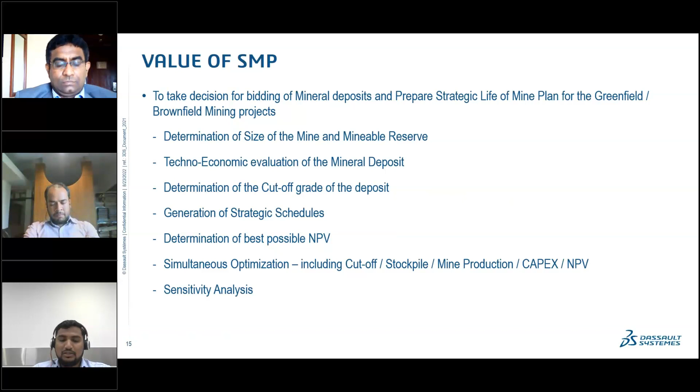So coming to the inputs for the pit optimization. This strategic mine planning tool takes inputs not only technical, it also takes economical and regulatory input. In technical, you will have your validated or evaluated resource model, which we call the tonnage grade model, in which you will have your estimated grade material. You will have a density defined in that, rock types defined, lithologies defined, and the topography defined. So that complete resource model, which is evaluated, will be taken as an input for the strategic mine planning.

And the other input in technical is your geotechnical parameters. That means slope angles have to be defined, because until and unless you ensure the slope angles, you cannot get the ultimate pit limit. It's not a vertical top-down kind of thing, so the pit has to be in a particular slope which is operational. So geotechnical parameters can also be included in the strategic mine planning tool, and you can have various methods to give the slope angles - a single slope angle, or slope angles based on the bearing, based on rock types, or based on any other parameters defined in the geotechnical study report.

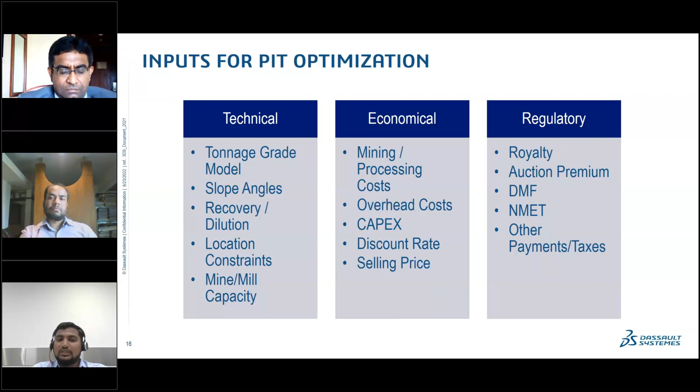Nested pit shells are based on the revenue factor. You have defined the selling price. Let's say, for example, you have defined $100 as a selling price for a particular commodity.

What strategic mine planning does is it gives an option to define the revenue factor. That means, with respect to the selling price, if your selling price is reduced by, let's say, 30%, what should be your pit limit? If your selling price is increased by 10%, what should be your pit limit? So based on the revenue factors, you can control how your pit shells are defined.

Based on the revenue factor, it generates a nested pit shell, a group of pit shells, which can be further used for generating the schedules, for selecting the optimal pit shell, which will be functioning as our ultimate pit limit.

And for that, we have tabs already defined, like economical parameters. So all those economical parameters will be given here, along with the grade cutoff tool.

Based on that, it will give the pit shells, the range of pit shells. So at the bottom, you can see the color coding has been given, pit shell number 1, 2, 3, up to the like, the pit shells.

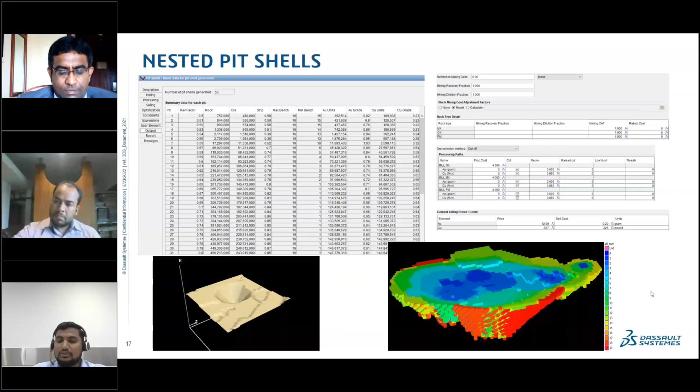Once this nested pit shells has been generated, you will select one of the pit shells, and for further analyzing or optimization, you will determine the optimal net present value of the particular project.

The input you will give here is your initial capital cost - what's the capex you will be funding into the project, what you will be keeping into the project, and what will be your terminal value. Terminal value is nothing but once your mining is completed, what will be the terminal value of the project, because you will be having the machineries, the plant, the buildings. So if all those are dismantled and sold, what will be the terminal value? That's the terminal value.

And replacement capital cost - you start with certain machineries, so they have to be periodically replaced, like every 5 or 8 years. So based on the time, maybe after 8 years you will be replacing the excavator, and in that year you can inject additional capital cost. This way you can define the time period - it is not fixed. In the strategic mine planning tool, this helps you to define your capital at a particular periodical time investment.

And you can define the discount rate per period, and also the implicit or explicit time cost. Implicit time cost is whatever cost you are defining - whether mining cost, processing cost, selling cost, or other overhead costs - that will be the same for the entire life of the mine.

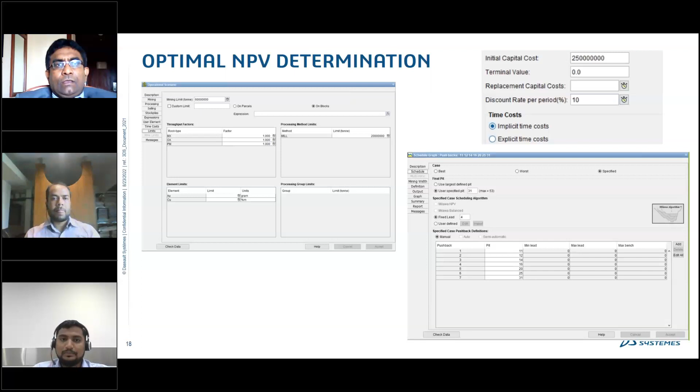And from that you can generate the strategic schedules. Why strategic schedules are important is your NPV - this schedule determines your NPV.

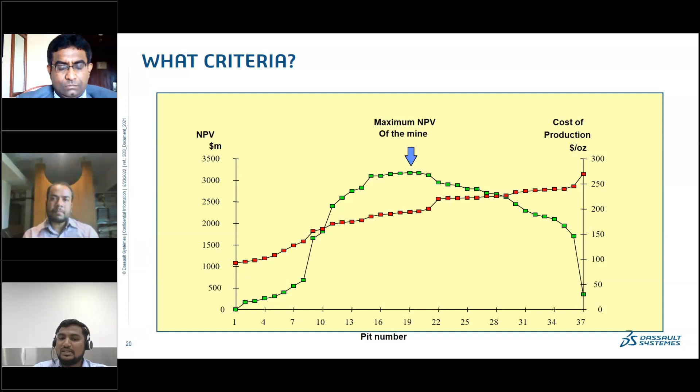So it depends on the organization which pit shell has to be selected as their ultimate pit limit. If the organization wants to maximize their NPV of the mine, they can select the pit shell giving the higher revenue, higher NPV. And if the organization's objective is to produce below $225 per ounce, then the capacity of the mine will be increased, but it will sacrifice the NPV too, because when you increase your ultimate pit limit, you generate more overburden and your lead distance increases. So considering those, your NPV will be less. It depends on the company objectives which pit shell has to be chosen. This is the best example to understand that.

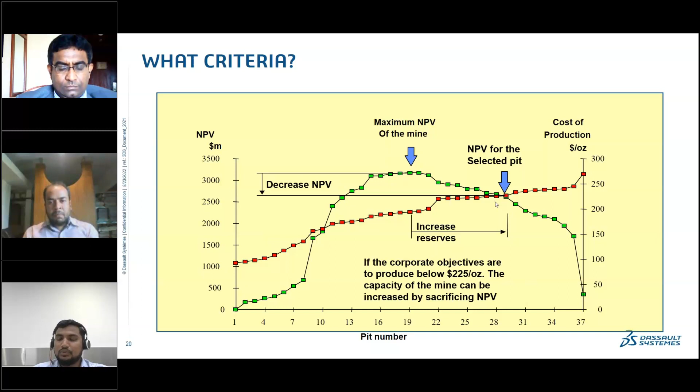You can see at a particular pit shell, the max NPV increases, after that it decreases, and there is an increase in reserves from the maximum NPV pit shell to the user-required, or you can say the company-targeted, pit shell. So there is an increase in reserves, but a decrease in NPV. These are the different criteria an organization can use to select a pit.

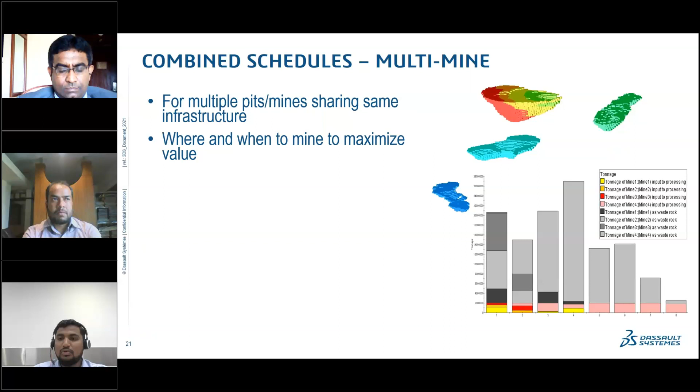Apart from that, what we've been showing is for a single project. So what if you have multiple mines but shared infrastructure, like your processing plant, crushing plant, mining fleet and so on. This helps you understand where and when to mine to maximize value, because each mine you'd otherwise have to optimize separately and then combine in Excel, but that won't give accurate value when you have shared infrastructure. So this strategic mine planning tool also has an option to include all four mines and then run the strategic schedule there.

Another requirement is to optimize the blending from multiple mines when you have a single processing plant, so the input grade stays consistent. You have to optimize the blending for multiple mines - from which mine, how much you have to produce, what kind of material every period, that is every year, so that you get a constant grade to the plant. That needs optimized blending, and you can use the same resource model or merge all the resource models. Let's say if you have three mines, you can merge the three resource models into one, and do the optimization process, or else use the same model with a drop-down option for each mine.

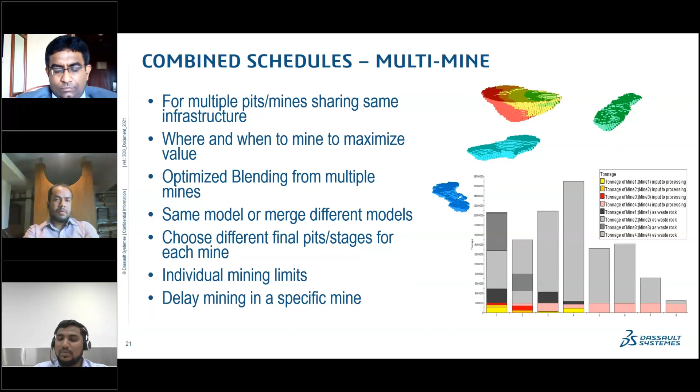You can select that resource model and choose different final pits or stages for each mine, because when targeting the process plant for particular quality or maximizing NPV, the pit stages or final pits will be different for each mine, and you can give individual mining limits. So one mine can produce, let's say, 0.5 million tons, another 1 million tons, another 1.2 million tons. You can give individual mining limits there, and also delay mining for a specific time. Let's say the first mine got all the approvals, but for the second mine the approval is delayed for 6 months, so you can give the delay in mining for that specific time. Also, if you have water issues or something in between, you can include that as a delay too.

Next is the strategic mine planning's advanced strategic scheduling tool. Whatever optimization and strategic schedule we've generated, we've evaluated each stage step by step - we've generated the schedules, evaluated the cutoff, what should be the cutoff to get higher NPV, stockpiles, and blend.

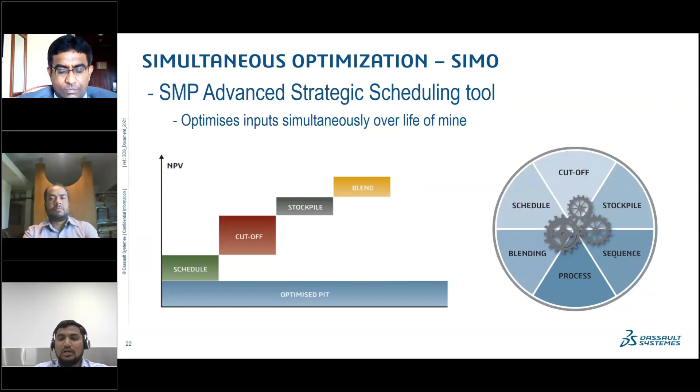But this simultaneous optimization simultaneously takes all the inputs - cutoff, what the stockpiles should be, what your mining sequence is, in which direction you want to mine, process throughput factors, blending parameters, schedule parameters. It considers all of those and generates a single schedule, so there's no need to validate one step at a time. It validates all those parameters, and it also helps you optimize the capex.

Let's say in future, if you are increasing your mining limit, for every ton of increase in the mining limit, what will be your investment per ton, so you can see how you can optimize your capex. For example, from 1 million to 2 million ton, if you are increasing your mining production, and let's say your mining cost will increase by $1, how much capex you will require and how your NPV varies. If it is $2 per ton for the increase of the reserves, what is the impact on NPV? This way you can optimize your capex too, and it unlocks the hidden NPV, because you are evaluating all the parameters in a single go, where you're missing in single steps otherwise.

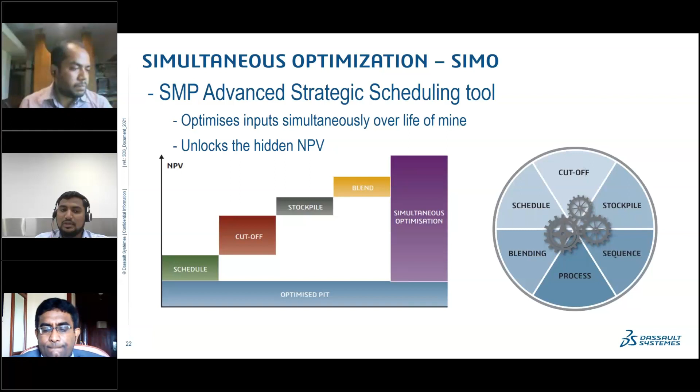The next one is, you got the NPV, but you want to check what parameter is most sensitive for your project. Like you are giving a mining cost, processing cost, but what happens in future if your mining cost increases or decreases? What impact will it give onto the NPV? So you have to observe which parameter is very sensitive or delicate, so that if that parameter changes a little bit, let's say even for $1, the NPV change may be more than what is permissible.

On the right hand side you can see there is a red line, which is the price for AU, that is selling price of gold. You can see selling price of gold in this particular project is very sensitive. That means if your commodity price is changing, you have to rerun your scenario, and check whether you're going in the right direction, whether your current mining schedules or long-term schedules are in line with your corporate objectives, how your profit changes if that selling price is increasing, let's say by 10%, how much percentage variation in your profits. All this has to be checked. This sensitivity analysis through spider graph helps you understand what parameter is most sensitive for your project.

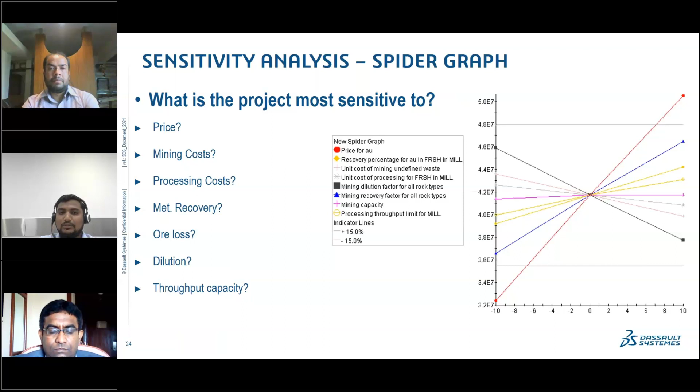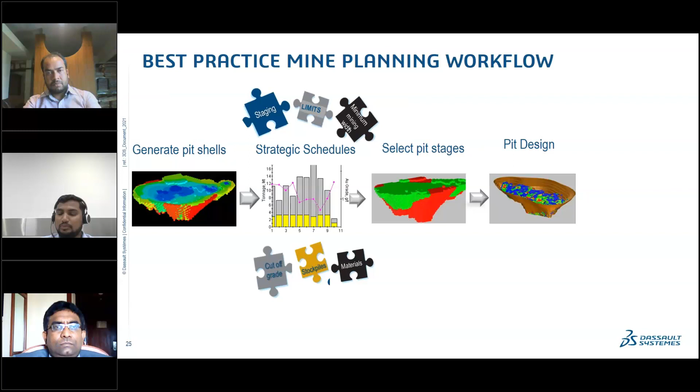The best practices workflow in mine planning is, once you have evaluated the resource model, to generate the pit shells and the strategic schedule so you determine optimal NPV by giving stagings, limits - mining or processing limits, throughput limits, minimum mining width - so your ultimate pit limit has the minimum working width at the bottom bench. You can give the cutoff grade to stockpile materials. With all these inputs you can generate the strategic schedules, and select the pit which will be your ultimate pit limit based on your objectives and the stages. You can select the stages, that is pushbacks, in order to achieve the ultimate pit limit, and transfer it to the general mine planning package, like for pit designing and the tactical schedule, for generating your long-term or short-term schedules to create executable plans to operate or excavate the mineral there.

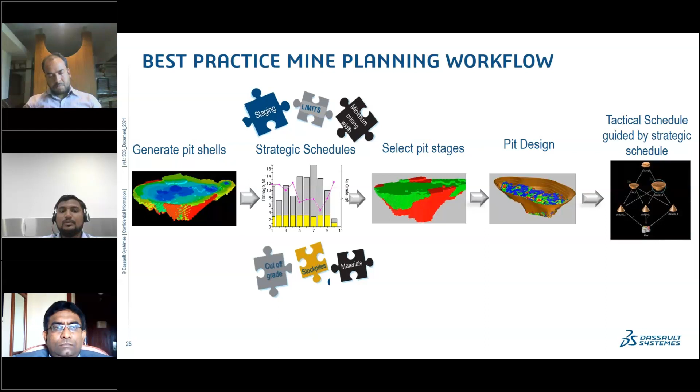Next, strategic mine planning also has a value in data centralization and collaboration. There is a web-based platform called 3D Experience platform, onto which you can centralize your data and collaborate for evaluating your mineral deposit for the auctioning processes. Various departments work together - finance works on the costing part, geology department works for preparing the resource model, and engineering department works for generating strategic schedules by taking inputs from geology and finance. The leadership team again evaluates the financial model you have created. So all departments are currently running in silos, and they need to be collaborated so that you get better value, with a track of each work, who is doing what, and all.

There will be a single version of truth because you have tracking of the file, and you're able to see which file is prepared by whom and which file is the final file. If two or three people are preparing a financial model, one person may not prepare it at a single time; he may be making changes based on inputs from finance, geology, or other departments continuously. At a certain point you won't be able to say which is the final sheet, and if he has made changes in the final sheet, recovering the earlier financial model is difficult.

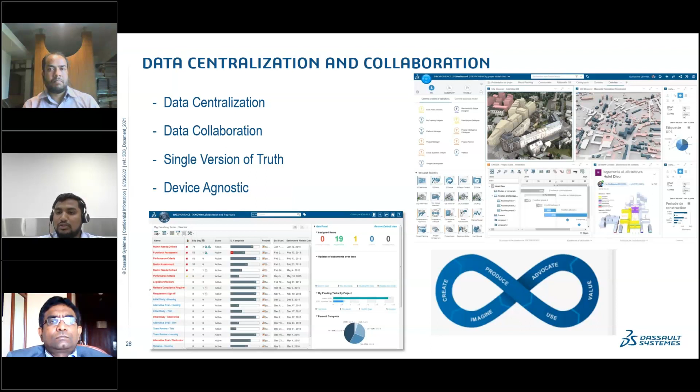So this is how your data collaboration works. It has user-based access, so you can control which user can edit, view, or work on it. You have user-based access here.

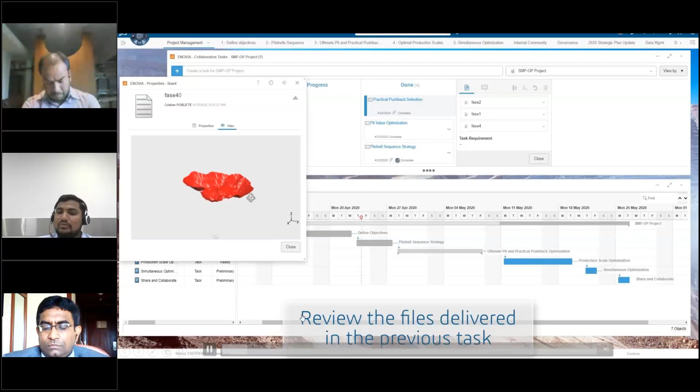And this is collaboration. If you have given a task to the finance or geology team, you can track those tasks, assign tasks, and review the files shared with you. If a geologist has prepared a resource model and you want to review it, you don't need to install any software — you can review it in the platform itself.

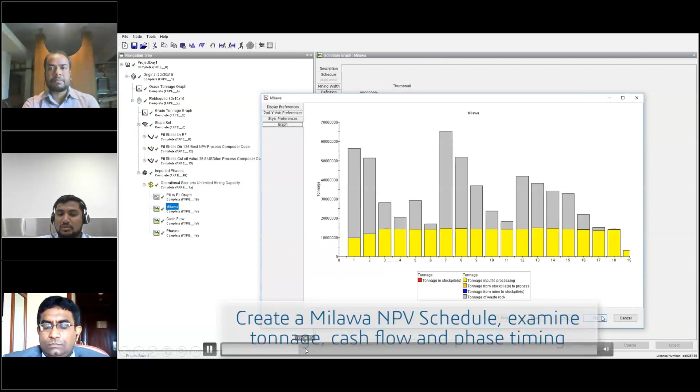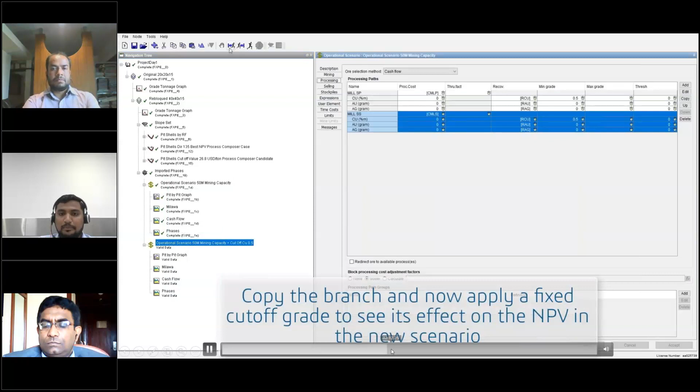Then you can work with optimization strategic schedules in the strategic mine planning tool. This is the entire strategic mine planning tool workflow, which I'll show in the demo here. Once you get the results, you want to optimize what will be your optimal mine capacity to fit the process, at which fixed cutoff grade you'll have maximum NPV. To determine that, you have to create multiple scenarios in the strategic mine planning tool.

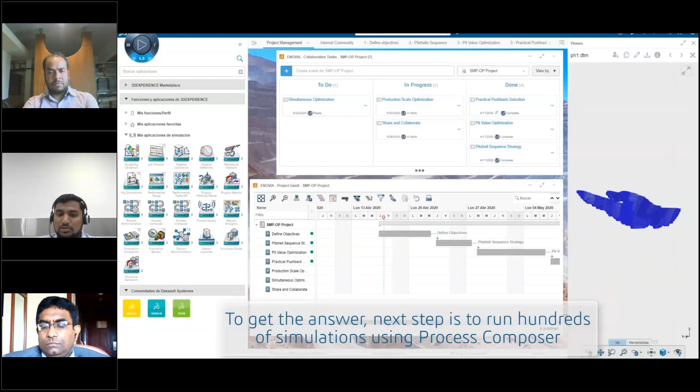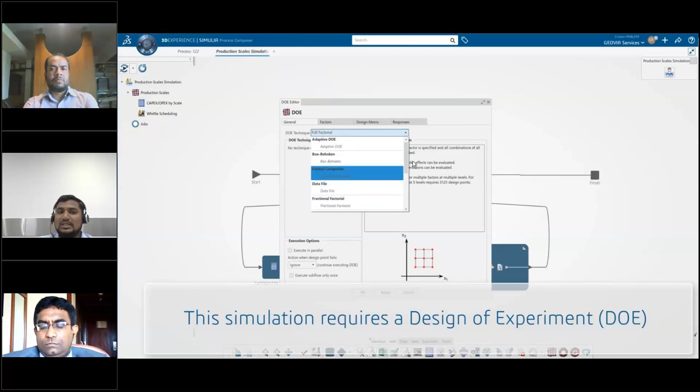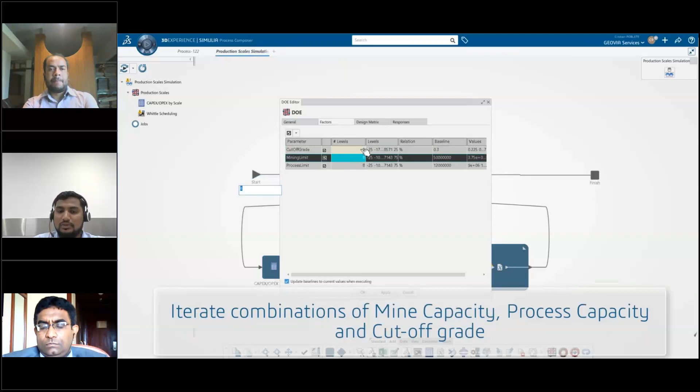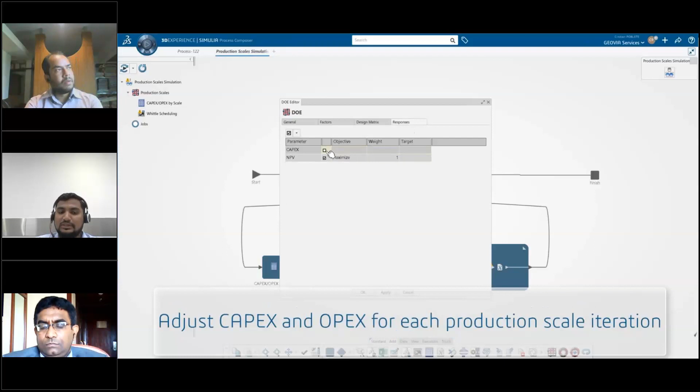But when you combine this simulation application with that — because in the platform you have multiple apps, like on mobile we have apps — you can use those apps to generate it. This design of experiment or simulation tool is one of the applications which helps you simulate those options. It will iterate combinations of mine capacity, process capacity, cutoff grade, and any other parameters you define, and you can also adjust capex and opex for each production scale iteration.

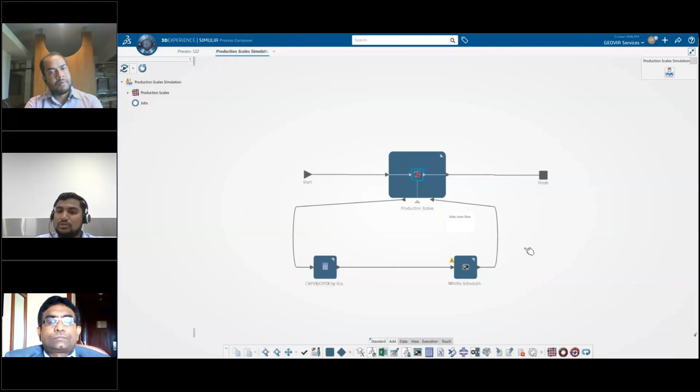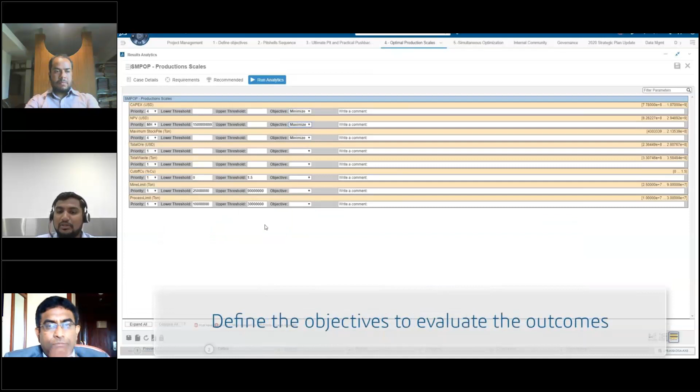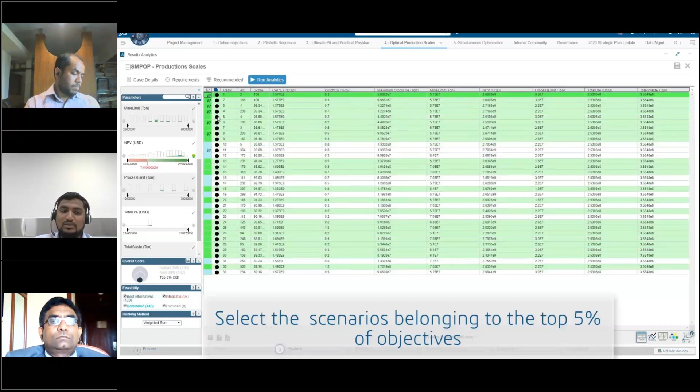You can design a workflow for how your simulation has to be done, and that workflow can be defined by the user itself. You define the parameters, run the strategic mine planning tool, and then perform a simulation or design of experiments. You can simulate it with different techniques like Monte Carlo, Six Sigma, and so on, and it will give you the best result. You can review the results graphically, including scatter plots, charts, or bar graphs.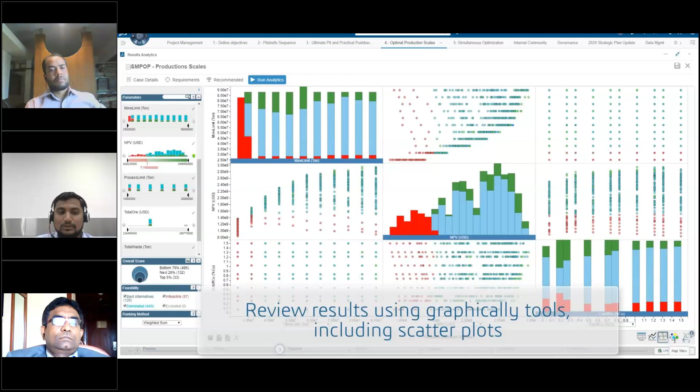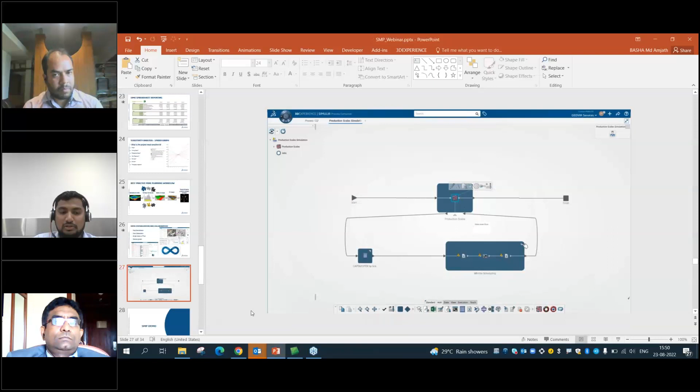Yeah, it's taking time. So this is about the simulation, and coming to the strategic mine planning demo. This is the tool. I'll finish it within 5 minutes itself.

So this is basically a copper project, also having a copper gold project here. This resource model is the initial input to the strategic mine planning tool, and after that you have to assign your geotechnical values, that is your slope angles.

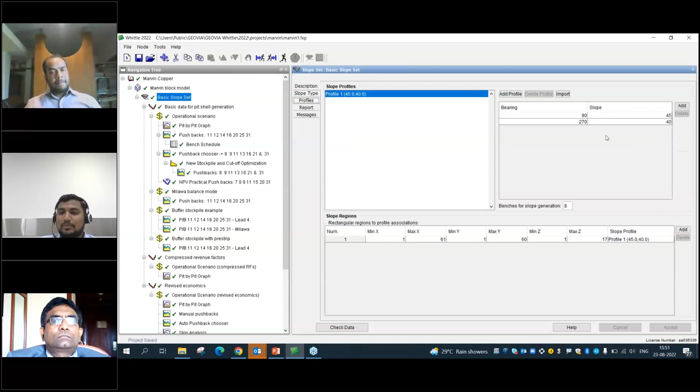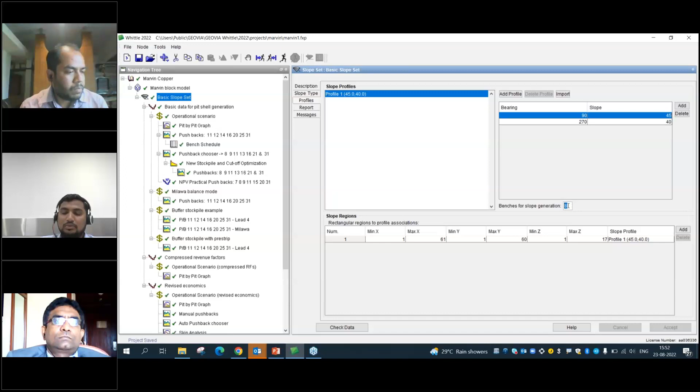You can define the slope angles by slope regions, or by zone numbers, by rock types. Here, based on the bearings, the slope angle is defined like 0 to 90, 45 degrees, and after that you will be having 40 degrees in that region. You can define the maximum benches for the slope angle generation - like in order to achieve 45 degrees for ultimate width, you have to mine a minimum of 8 benches here. There is a thumb rule if you calculate the number of benches for it.

Again, you have to generate the pit shells for the pit optimization. It uses the Lerchs-Grossmann algorithm, where it takes care of all the costs like reference mining costs, your recovery, dilution, your processing costs, grade, cutoff grade, selling costs, and selling prices, and you can give the revenue factor stages there - what will be the minimum and maximum fixed factors we can give. Based on that, it will give an output.

It will generate nested pit shells, and for each pit shell it will give how much rock is there - rock is nothing but ore and waste. From it, how much ore you can mine, what will be your stripping ratio, how many benches you are going to mine in a particular pit shell, what is the total units or gold units or copper units available, and what's the grade of it.

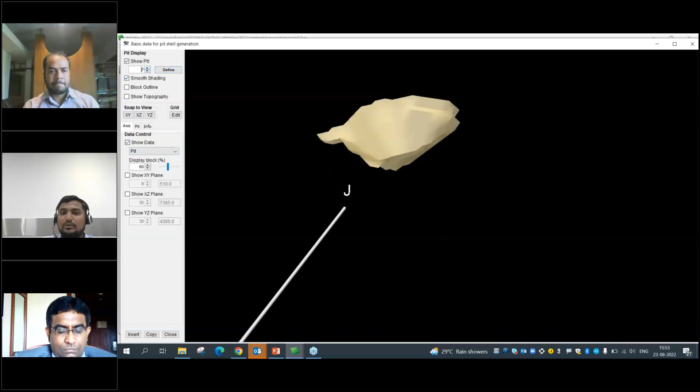You can view it in a 3D viewer, so that you can see how your pit shells are advancing. You can see the pit shell is increasing, like 15, 16 - whatever the number of pit shells are there, you can view it.

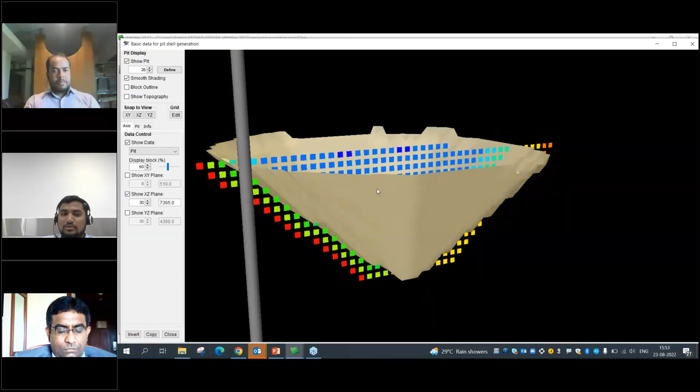You can also view it in different planes, either XY plane or XZ plane. You can see these pit shells here. The color codes - you can have the legend from the pit info here, so it will show you the legend. You can change those scales also, so you can change the legends.

Once you got the pit shell, then you have to generate the schedules. You have to determine your optimal NPV. For that, you have to assign your initial capital cost you are going to invest. You can see here $250 million has been invested into this project, at a discount rate of 10%. The mining limit here is 60 million tons, and the processing limit is 20 million tons.

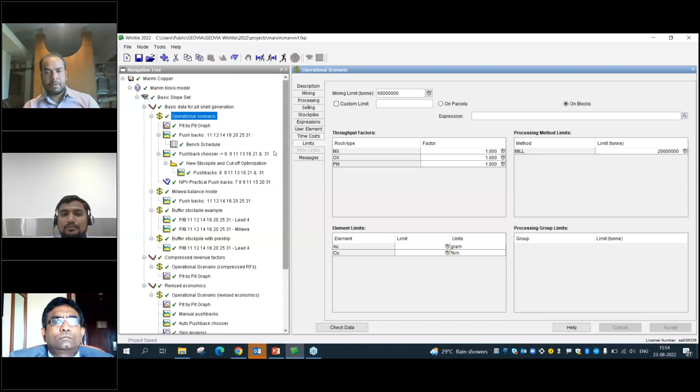Based on those parameters and the schedule parameters, what should be your fixed lead? Fixed lead is nothing but the maximum number of benches you will be mining per period. Here it has given 4, and manual view. So pushbacks in order to go up to the ultimate pit limit - you can define your pushbacks, or else you can define an auto option where the software takes care of selecting the pushback by itself.

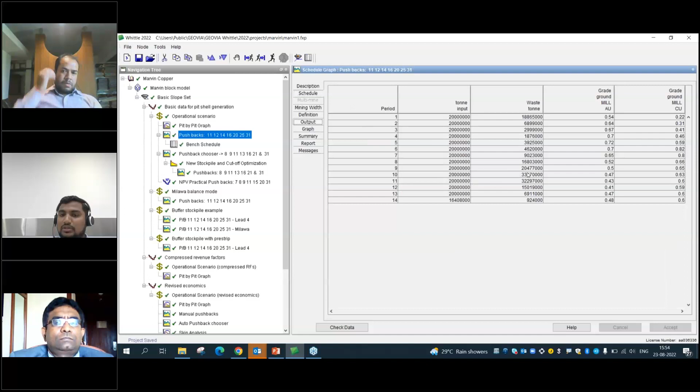In summary, for the selected pit shell, that is pit shell number 31, if you go for mining that, you will be having an NPV of 4,500 million US dollars, and life of mine is a little less than 14 years, with payback year of 3.84. That means within 4 years you can pay back the entire capex investment. The payback ratio is payback year divided by entire life of mine, and IRR of this project is 31.67. So this is how you can determine the optimal pit limit, optimal NPV, life of mine, and IRR.

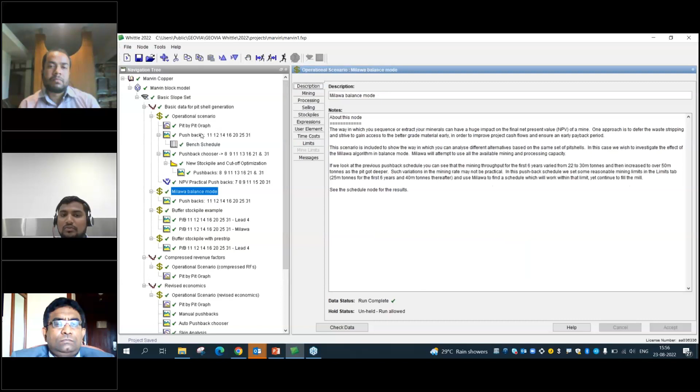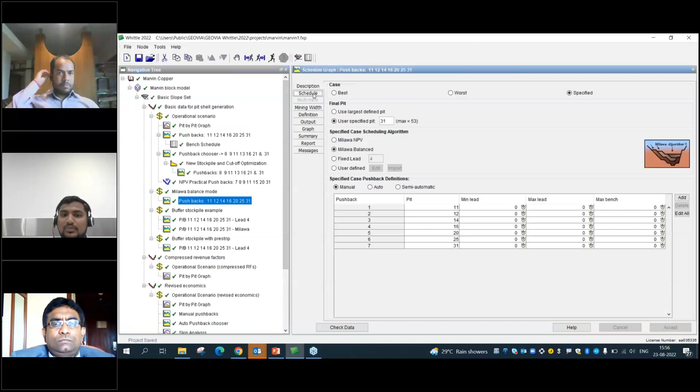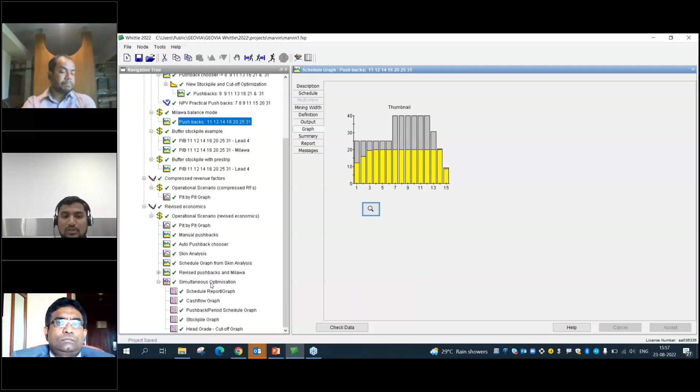You can do many iterations, change the parameters, and select the Milawa options. I'll show you one option, the Milawa balance mode. When you go for the standard one, you give a vertical advancement rate of 4 benches, select a pit, and generate it. In that, waste generation varies, so there's no constant strip ratio. When you use Milawa balance mode and select schedule parameters, it generates a schedule where ore is the same every year, and it tries to control waste too. You can see waste is the same in the initial 6 years, then from the 7th year it shoots up, but again it tries to balance the ore and waste ratio. This is how you use those algorithms.

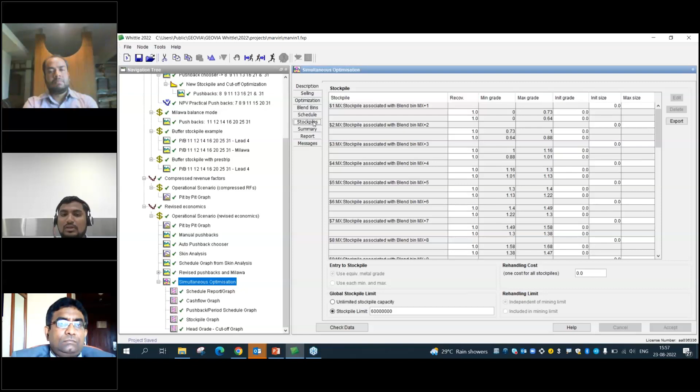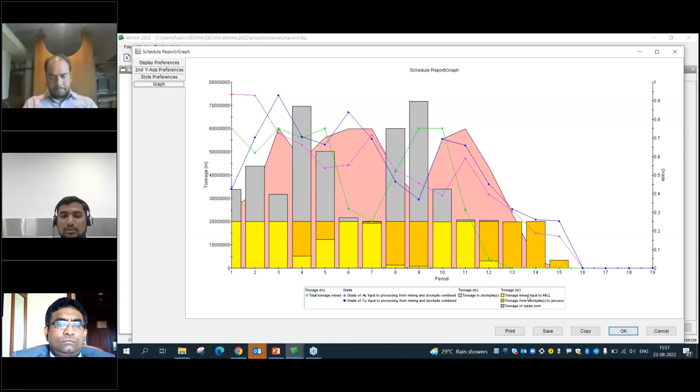In simultaneous optimization, you can give all the prices, define your blend bins, define your stockpiles to optimize your grade and cutoff grade, and then generate the schedule from that. So instead of validating each step, you take all the inputs and generate the schedules. This is how a strategic schedule, simultaneous optimization schedule looks, where yellow is tonnage mined and fed to the plant, and you can manage the stockpiles too. Dark yellow is tonnage from stockpiles to process, so directly from pit to plant, or from stockpile to plant, based on the grade requirement you've defined.

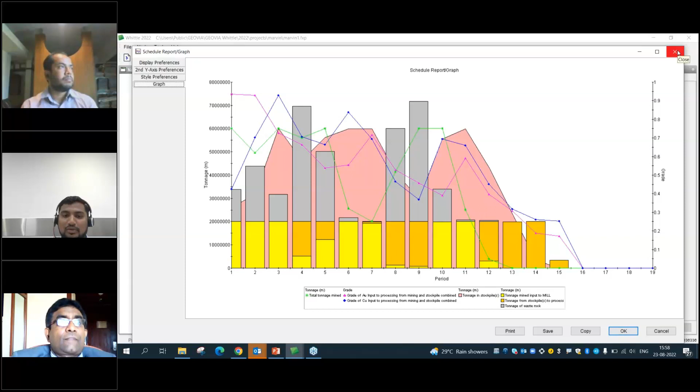This is about the software. Due to time constraints, we are unable to show it in detail in the application.

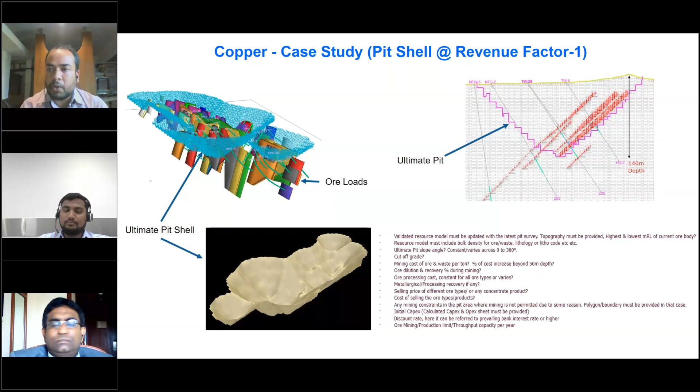There must be a validated resource model updated with the latest pit survey. Topography must be provided, along with the highest and lowest MRL of the current ore body. The resource model must include bulk density for ore and waste, with different lithology types and litho codes. The ultimate pit slope angle, which is a geotechnical parameter, must also be provided, and you need to determine whether it remains constant for the entire pit or varies.

Now the main benefits: the time value of money is the essence of evaluating NPV. Strategic mine planners find it difficult to decide the right time to mine a block of ore, because its value depends on when it is mined. When is the right time to mine it? This is the big question for strategic mine planners.

The conversion of geological resource to mineable reserve is possible with valid input of all technical and economic parameters. It takes care of mining constraints where mining is prohibited in the leasehold area, like permanent structures, high tension electric lines, rivers, public roads, etc. It also takes care of geotechnical constraints based on rock types and strengths, allowing different pit slopes to be provided. The year-wise mine production schedule is the most important part.

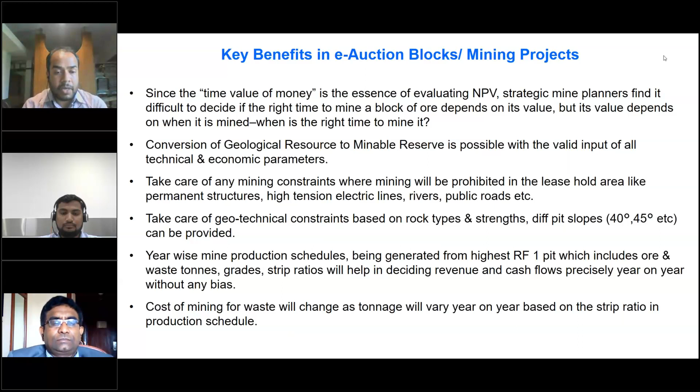The year-wise mine production schedule is generated from the highest revenue factor 1 pit, which includes ore and waste tons, grades, and strip ratios, helping decide revenue and cash flows precisely year on year without any bias. Different tons of waste will change your cost of mining. This determines the economic viability of the deposit, expected NPV, and expected return on investment, as you get the optimal extraction sequence.

The sequence and rate of mine production allow early access to high value material, delaying waste and development costs, prioritizing value without compromising the future of the operation. It defines the strategic direction of the mine, because you'll find a cutoff grade and can optimize your cutoff grade as well.

I have provided one Excel output from Whittle, where we generate the year-wise schedule that can be fed into a financial model in Excel, making it more precise and accurate, including the calculation of NPV, project IRR, and sensitivity for mining projects going for e-auction.

Here you will find the year-wise schedule. Year on year, you'll see how much ore and waste you are going to mine, along with the strip ratios and grades. You'll also find the discounted output. So you can build your financial model, and all the bidding parameters will be decided based on that.

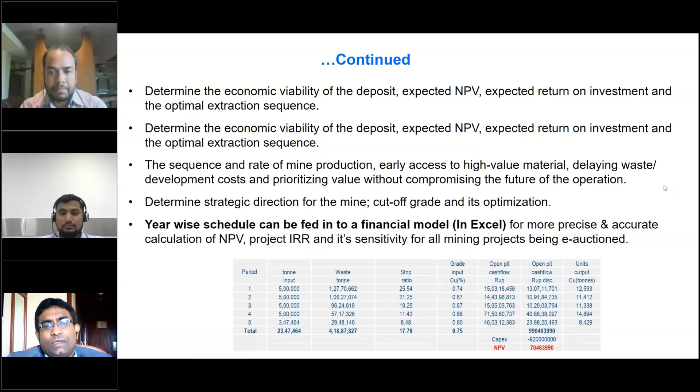This was a very good presentation, showing the benefits gained from the software, mostly on operational mines as well as from e-auctions. These are the two major points most important for the mining industry to find out how they can economically mine their projects. This will definitely help other participants think about their projects and how they can benefit by utilizing this technology or software. If there is any such requirement from the audience, our team will be ready to guide and support them on how best to utilize the software.